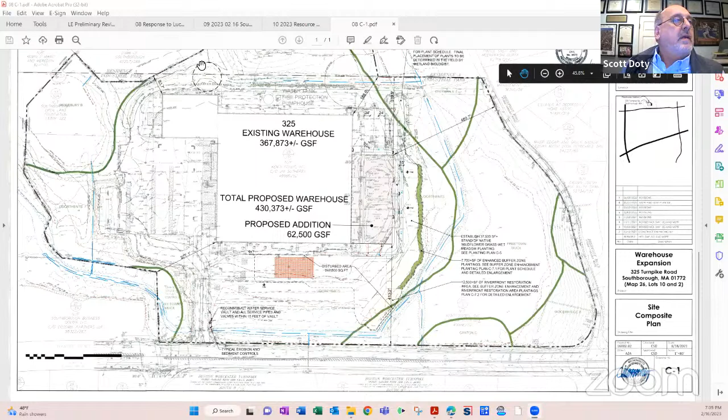Zooming in a bit, this is the west yard right here. And a great deal of effort has... by the way, Bill Pizzoni might join us. He had a conflict here, and he's been in the hospital on and off recently. He may not be able to join us, but he may pop in. Melissa, you may look for him on the list, and please promote him to the meeting if he comes in.

This is the west yard, the truck yard, and the proposal is a 16-foot high sound barrier that runs north to south.

I'll take you along the outer edge of this driveway curve at the northwest corner of the site, and then it angles off and runs along the west edge of the truck yard, closing down in the southwest corner of the truck yard.

The nature of the construction involves a sort of foundation — round precast foundations that get augered, with holes augured and placed, and then posts come out of them, and panels are laid on them.

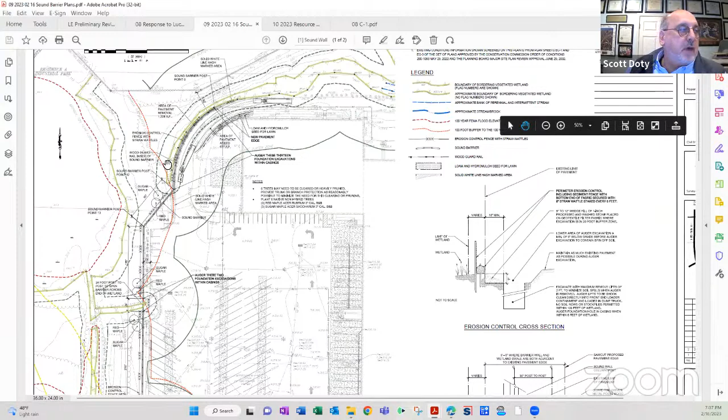There are a series of drainage channels built for overland country drainage that run along the edge of the driveway at that curve.

One of those finger-like channels extends towards the yard, and then there's another one that runs parallel, further away from the yard.

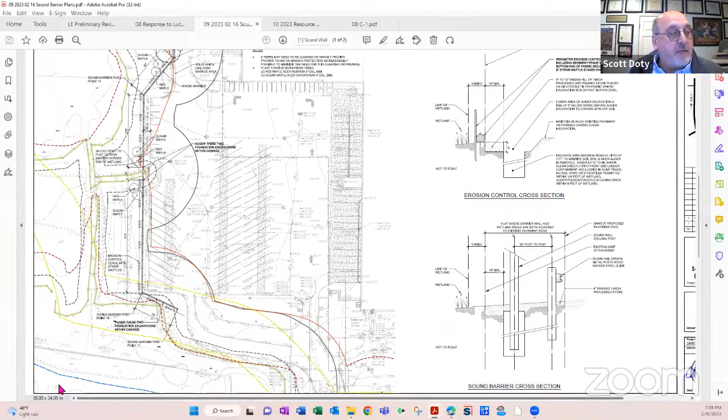Down here in the southwest, almost off this drawing — actually off this drawing — is the intermittent stream that runs around and through the overall site. So that's the general lay of the land.

I'm going to zoom in on the driveway curve on the next sheet. The planning board asked for some additional information on it, so we prepared this plan enlargement, which I think is helpful to everyone.

The wall runs along and will be built in what is existing today as paved area. What we will do is basically take the pavement out and build the wall in a gravel area on that edge.

Then we'll cut in on the inside of the curve and add pavement on the inside so we can still maintain access around that northwest corner of the building.

This is work that's within the 20-foot no-disturb zone, and so we're asking for a waiver for that from the commission.

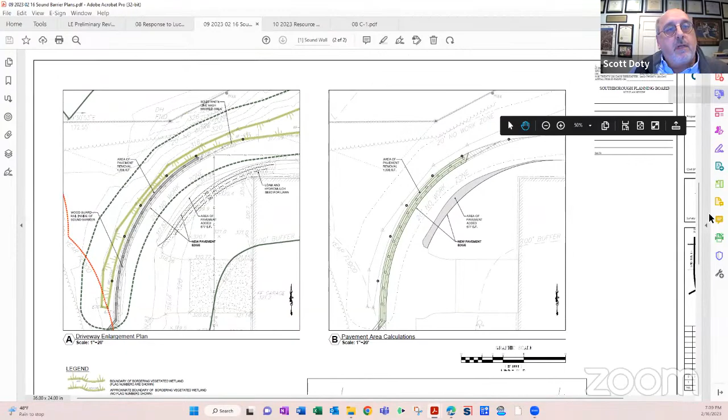As we continue on south along the layout of the wall, after it gets past the south end of the drainage channel that has developed into a wetland over the last 50 years, the wall goes off on an angle.

That allows it to run to the far west edge of the truck yard, about 13 feet off of the backside of the curb.

That allows us to keep lights and block heater stations and other apparatus that's along the back side of that west curb.

Again, you can see it's out in this area here, outside the 20-foot zone. The 20-foot no-disturbance zone line is this dark green dashed line I'm following now — I hope you can see the cursor.

This is that finger channel that, like I said, goes towards the truck area.

All the panels on the sound barrier are 15-foot pre-constructed panels put in place on top of these piers. We were able to get a 24-foot length, which we propose to bridge across the east point of this wetland.

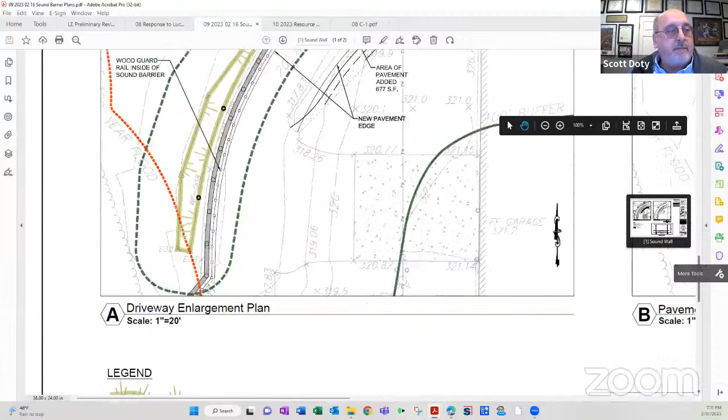What that may look like — we drew an elevation here. The slopes are probably slighter than shown, but the wetland is approximately 8 feet wide.

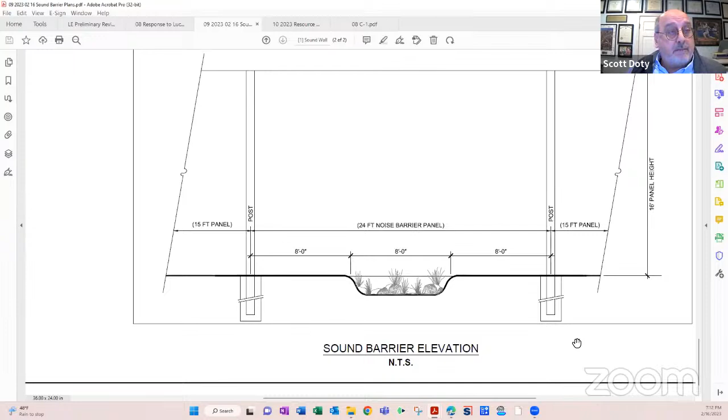We would have one post 8 feet off of it on one side and another 8 feet off of it on the other side, and then this 24-foot long panel would be attached to those two posts, bridging over that area and maintaining the linear layout of the wall.

I hope you're not getting too dizzy with me jumping around, but I'm back on the overall plan.

The wall then continues down until it gets to that southwest corner, and to enclose the noise generated by the yard, the sound consultant thought it was important that we then turn that corner.

So we go into the 20-foot no-disturbance zone again, outside of the wetland, and again we've had these piers that are 15 feet on center.

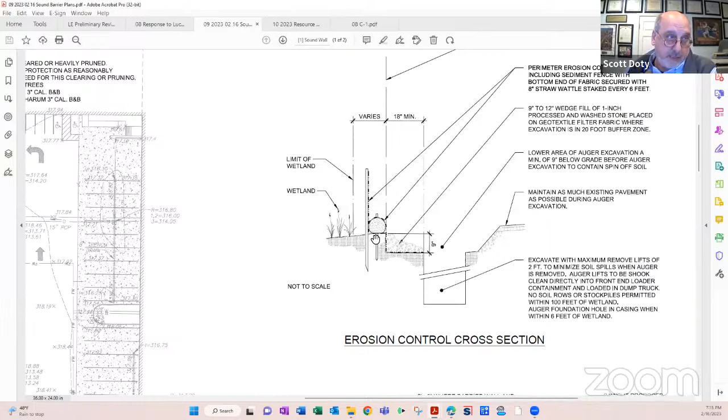I'd like to talk for a minute or two about construction of these piers. Though we are rather close, especially up here at the driveway to that wetland, we believe we can adequately protect it. The first step is putting in a good, robust erosion control fence anchored by straw wattle at its base. Then just where the piers are, and in some places near the driveway where it curves and there's room, we excavate down a bit so we're self-containing any excavation or spin-off soil that comes out as the auger digs these holes for the precast post foundations.

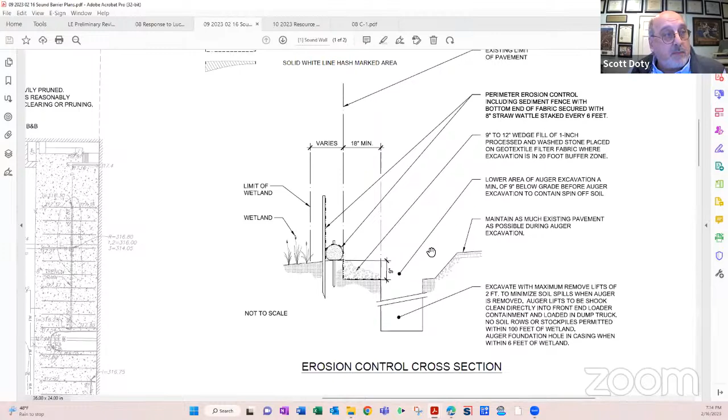We've provided a description of the phasing of the work that I hope you had a chance to review. Part of that is excavating and getting the soil out of this right-of-way area immediately, so that we're not stockpiling soil in the area, because what's going to primarily come back and fill in those areas later is a gravel surface underneath and around the posts where the foundations are.

Then the existing grade can be recreated, but instead of it being pavement or lawn in that specific area by the foundations, it is a washed stone.

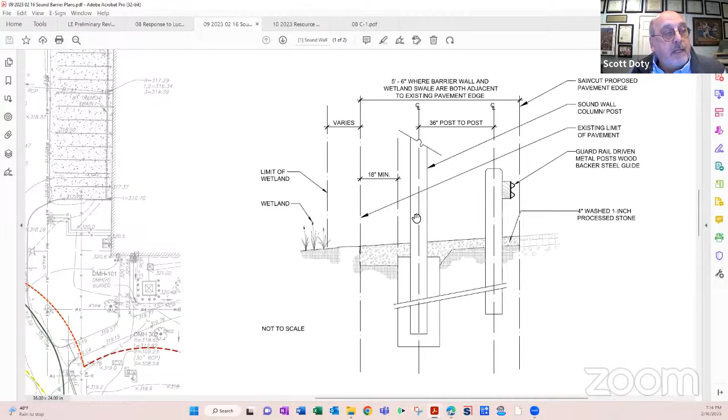Up in the area by the driveway curve, we think this is actually going to reduce pavement, which we think is a net benefit, reducing the impervious surface—not measurable, negligible probably, but still an improvement nonetheless, because we're going to be taking away about 1,200 square feet and adding about 700 square feet on the inside of the curve.

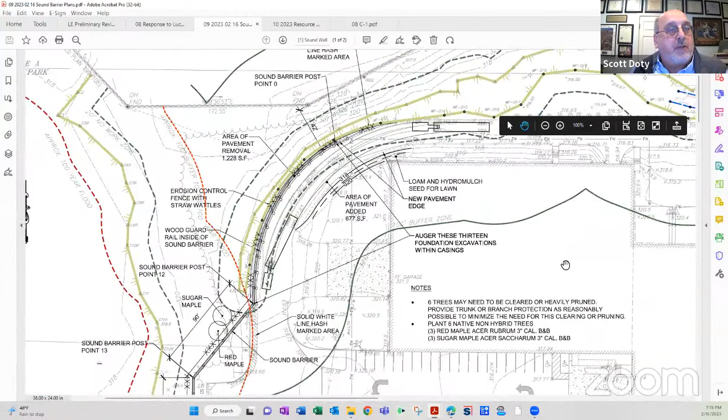In these areas, the drainage will continue to head towards the drainage channel, but now it'll be filtered somewhat in that stone gravel, much like the sound wall that was constructed on the northeast corner of the building back several years ago. You may remember that—some of you have been out to the site.

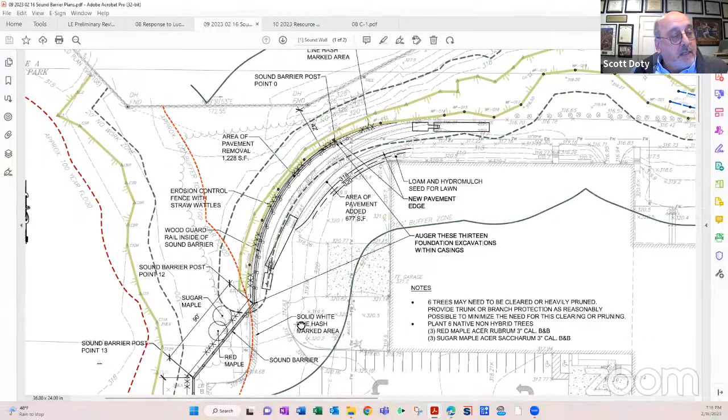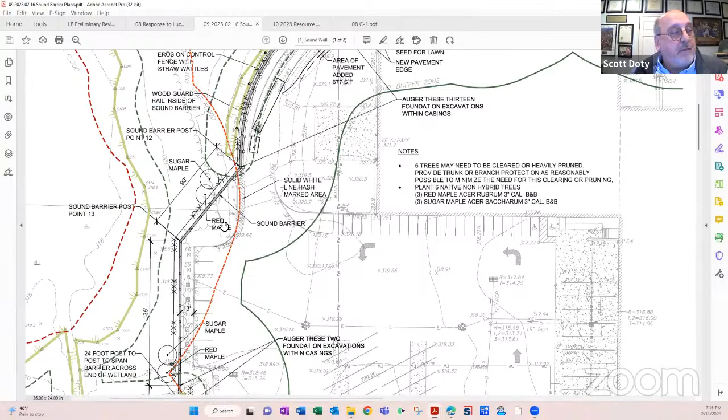Other elements: in a couple of places there are some mature trees over 6 inches. We think 3 or 4 need to be pruned, maybe 1 or 2 need to be really removed. We're proposing to plant a couple, 3 sugar maples and red maples in those areas where we think we're going to be encountering the need to remove some tree limbs, and maybe 1 or 2 trees in that general area.

I want to emphasize that we went through quite a process with effort with the neighbors and the Board of Health to come up with, and sound consultants on both sides, for Ken's and for the town and the neighborhood, a design. We do know we're asking the commission to waive this no-disturbance area, but we believe this is the best alternative for the sound, and any other alternative wouldn't do quite as well. We ask if the commission would kindly approve this.

Let me check my notes here. I guess that's about it. I'd be happy to answer any questions at this point, Mr. Chairman.

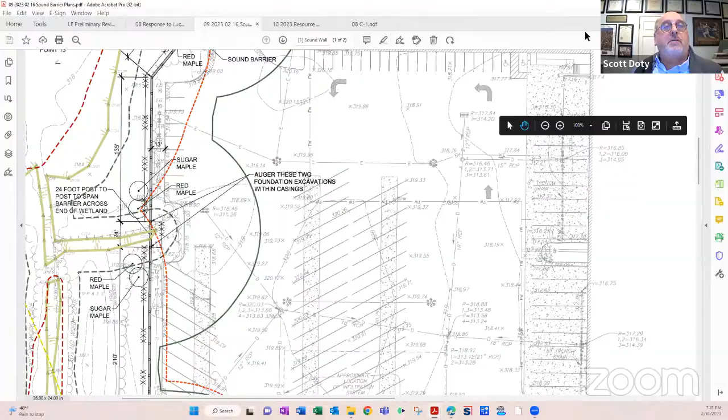All right, thank you. To the screen, if anybody wants to go to the plan, I can jump back to it. I know Joe went out, looked at it, had a good look at things, came up with some good points. We did address them and sent our response earlier today, copied Joe on it. One of them, I think, was a misunderstanding on one of the lines on this plan, and we hope our responses were okay and helpful. We'll get his update in a second.

First question I have, Melissa, is have we received an official request to waive the 20-foot in writing? I did in the narrative. I'm sorry, Melissa, go ahead—you were going to answer. I don't think you submitted the official bylaw request form, but you did request the waiver within the application. Oh no, I did. I think I did fill out a form. Okay, I'll double check. Yeah, I did fill out a form. If we'll check on that—if I'm mistaken, we could do that immediately. Sure, I did. Yep, I have it all set. Thank you, okay.

Joe, you have some commentary on this? Not too much, environmental. I did get a chance to go out and take a look at the site. The edge of the delineated wetland was staked in the proposed work area.

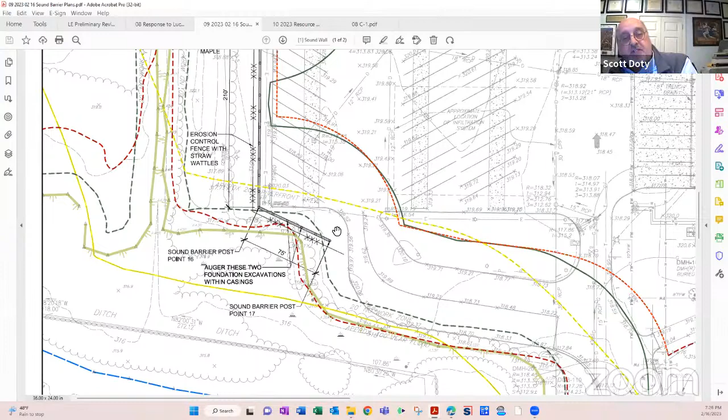I think it's probably important that the panels remain at their 15-foot length. Yes, they're standard, they're built that way. So you're not doing something unnatural. Right. No, it's a good suggestion.

I don't know that we're in need of anything else in terms of a filing tonight. So what we could do is condition that, Russ. Right, and if the sound experts kick that back for whatever decibel reason they come up with, we could say, since they put the 20-foot waiver in and we have the reasoning for it, you're asking for a little bit better mitigation. If they can't do it, then we're covered anyways. It'll probably still be in the 20-foot, but much further away than it is now.

These are all 15 feet, and that one's 24. I get it, but I do this for a living, and you start drifting a little bit, and they start multiplying, and it adds up. If we just start at the critical point, it's easy, and that's how this was laid out. That's the point of beginning for the coordinates on the spots.

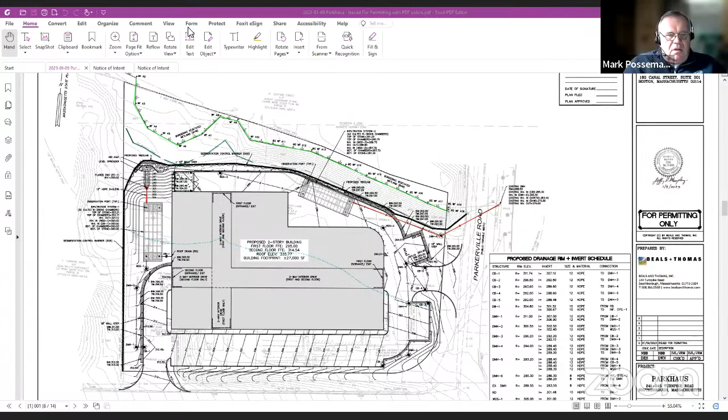Thank you. Question: how do the vehicles get to the second floor? I knew that was going to come up.

So there's a driveway entrance or garage door entrance at the lower level on the right side here, closer to Parkerville Road. And then this drive aisle that goes along the front of the building, between the building and Route 9, as well as the driveway coming off of Route 9, provides access to the second floor. There's no internal driveways or ramps inside the building.

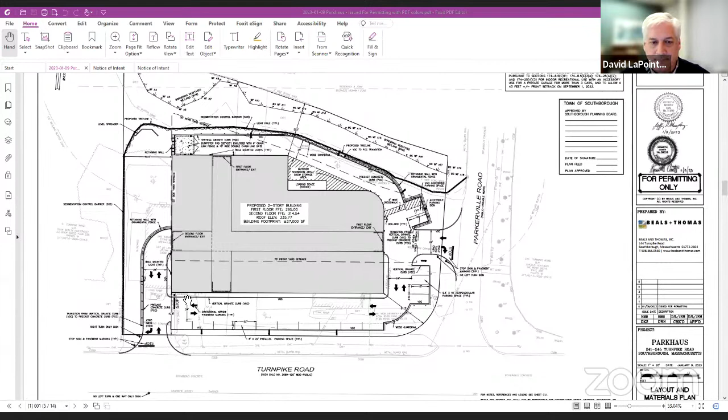Okay, yeah, when I saw that feature on the left there, the arrows, I was thinking there was an upper level entrance. Okay, thank you.

Yeah, let's open it up to Lucas, environmental consultant, for any comments at this point.

Yeah, I did have a chance to go out and look at this site and take a look at the delineation. There were a few flags missing and a few on the ground, but those were generally in the eastern portion of the wetland, which has a very steep slope and a clearly well-defined edge of wetland.

I did have a difference of opinion regarding flagging in the area of flags. I think it's A6. A6 is okay, A5, and A2 and A3. A2 and A3 I felt were a little bit low, maybe about 8 feet low.

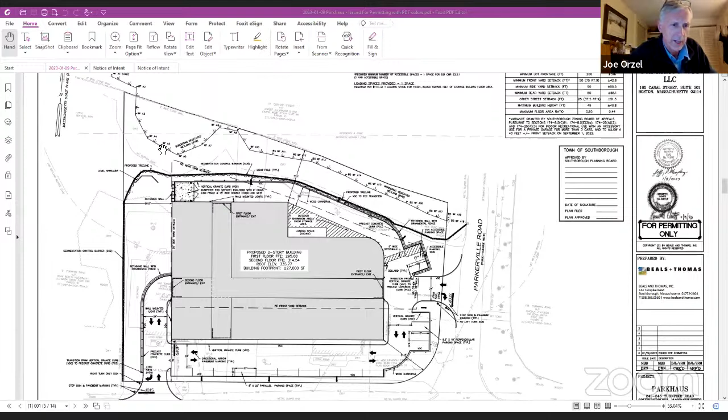And at A5, between A4 and A6, there's almost a gentle swale, a natural swale that kind of goes up gradient in that area. Although there's a lot of invasive species present at that location, I did see a fair amount of wetland vegetation and hydric soils. I felt that the wetland edge is roughly about 25 feet up gradient of flag A5. It kind of swings up from A4 and A5 to that point, which would bump up the 20-foot no-work zone. The rest of the flagging I thought was fine.

As I just noted, there was a fair amount of invasive species present at that location. It's true for much of the back of the property. So I recommend a construction phase invasive species management plan for any work that's going to be done at the back of the property that might impact areas with invasive species.

The proposal has a small amount of work within the 20-foot no-disturb zone at the eastern end of the site, along Parkerville Road. I don't know if alternatives were looked at for staying out of the 20-foot no-build or no-work zone. The applicant may want to address that. Granted, it is a shoulder of a road area, but I just didn't know if they looked at alternatives to stay out of the 20-foot zone.

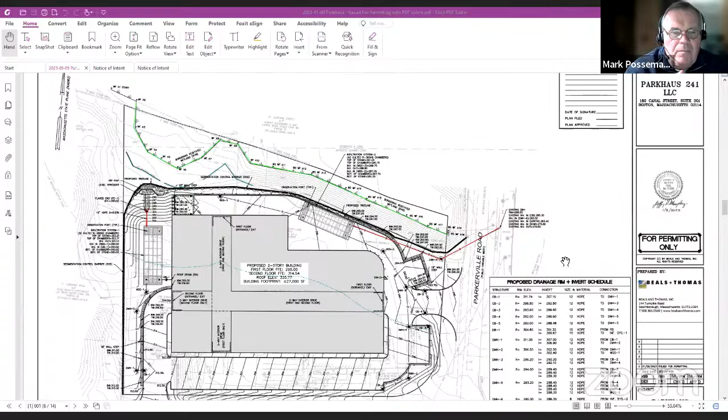So the septic system is currently still undergoing coordination with the Board of Health. But it is proposed, as you can see, between Turnpike Road and the southern face of the building, staying outside of the 100-foot wetland buffer. That's what I was wondering.

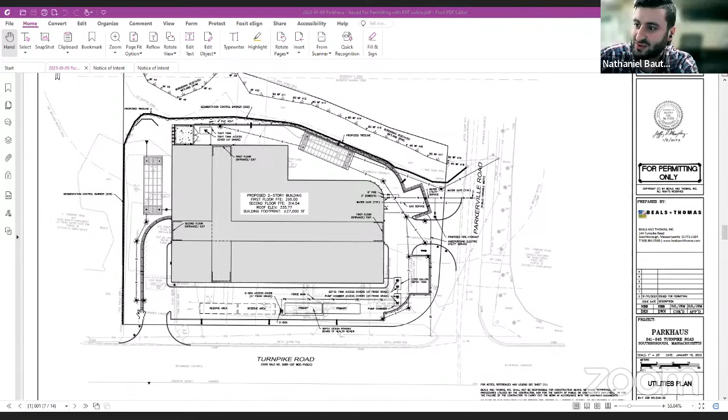On the eastern side of the site here, there are two rectangular design things right about where your cursor is. Go to the right and you see it. What is going on in that area? So these are retaining walls. Retaining walls on the site are proposed in three locations, as you ramp up from Turnpike Road to get to the second floor. But back to the east, why are those features that shape? What's going on in there? Parking spaces. Oh, okay, yes.

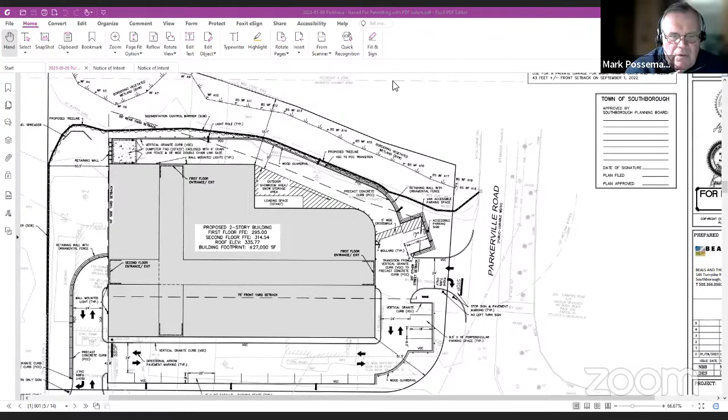Parking spaces. The layout and materials plan may be better to show. Yep, there you go. Okay, for the parking spaces. Yep. So the only parking spaces on this proposed site, aside from those being indoors, are those in that feature area there, and then to the south again, on either side of the entrance, off of Parkerville Road. Okay.

Melissa, do we have a DEP number? We do not. Okay. And we're still in the midst of a public hearing process with the planning board as well. Okay. And I think Fuss & O'Neill had some comments regarding the stormwater permit as well that still need to be addressed. Yep.

All right, other commission members, comments, questions? Yeah, you covered mine. I was looking for the septic tank too. I could see the drainage structures. Okay, anybody else, commissioners? No. I don't think we have anybody from the public here, do we?

Not a one, okay. So I guess the next steps are responses to our consultants' observations, questions, and issues. And we'll have to continue to the next hearing, or one further out, while you go through the process of the permitting?

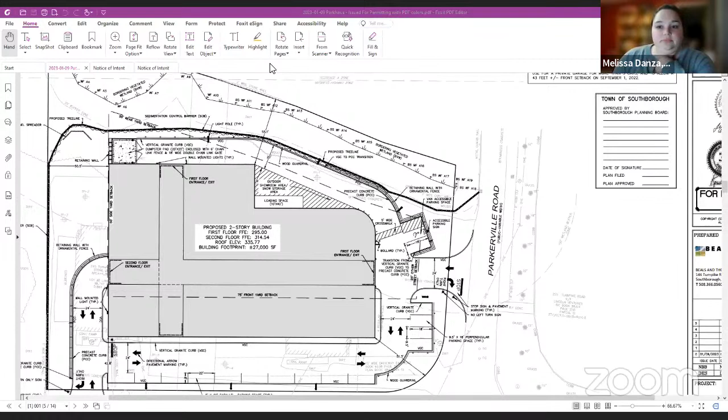So we meet every three weeks. Our next one is March 9th, if that helps you. I think we were thinking we were going to try to address the comments and get you revisions in time to be on the March 9th meeting. Yes.

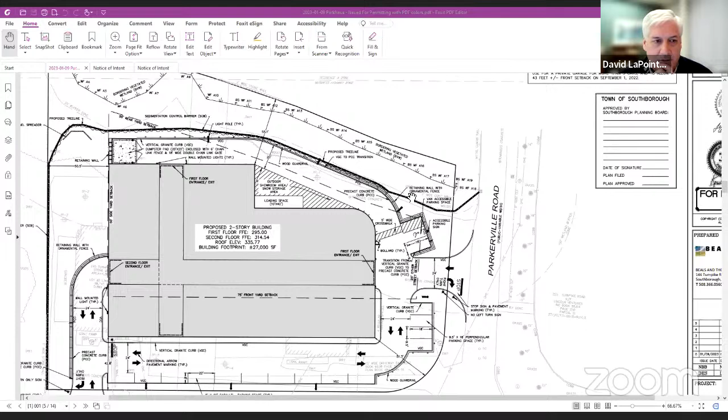But before we continue, can I just ask about the comment from Lucas regarding the wetland flag A5? By moving that wetland flag up gradient more, the 20-foot no-build zone goes with it, which would then put our outfall from our subsurface stormwater system in that 20-foot no-build zone. We were being very careful to try to stay out of it as much as we could based on the wetland line we were using. But at this point we're wondering if you would entertain a waiver request to allow that outfall within the 20-foot no-build area as a result of the change to the wetland flag.

Joe, how many feet do you think that flag has to move? I think about 25 feet. Oh, a lot. So that flag's going to be pretty much where the outflow is now. And then you got to get 20 feet off of that. Is it just one flag, or a point? It'd be just one flag. It would go from flag 6 to a revised A5 and back down to A4, essentially.

Why do you think there's a triangle there? There's like a little natural drainage coming down in that area. You can even kind of see it on the topos, the elevations that are right there, and how that kind of dips forward towards Route 9. Oh, okay.

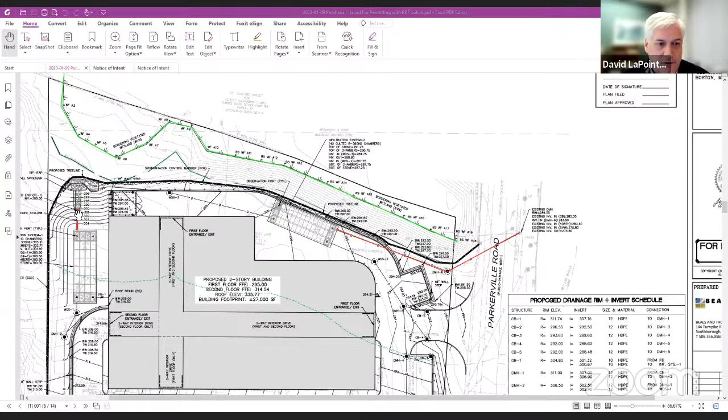I think if you guys can outline some alternatives and maybe put a narrative together, usually it's a lot easier for the commission to determine if there's no practical alternative, then they have some rationale. I like what Joe's thinking of, size, if it can go wider versus farther, but outlining maybe other areas and the setbacks for your various structures would be nice to lay out. Yeah, that's the other piece, is there's setbacks from the property line, from the building, so we're kind of squeezed in that spot a little bit. But sure, we can put together some rationale behind it.

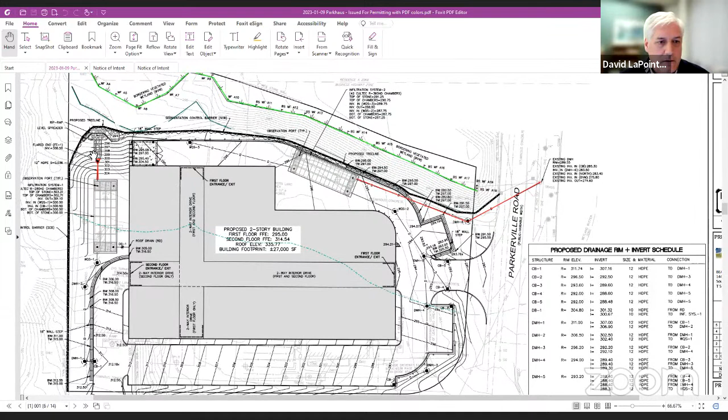Can you spin it around and put it on the north side, and have the outflow go to the west? I don't know, you guys take a look at it. We're not just gonna design it now, right, right.

Moving that flag 25 feet, we end up having a permanent disturbance, and we also have a disturbance where we have the outfall from that drainage structure really close to the wetland edge. It's really not that attractive.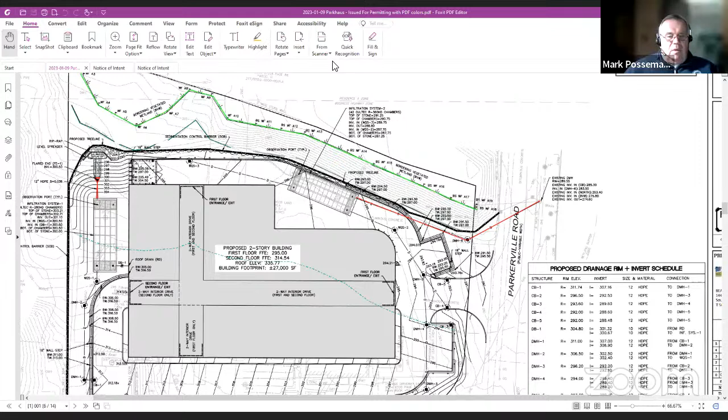So, all right. So what I heard you say is you think you can get all your materials in by our deadline to meet the March 9th hearing date. All right, so given that, we'll have to continue to March 9th. So with that, do I hear a motion to continue this hearing to March 9th?

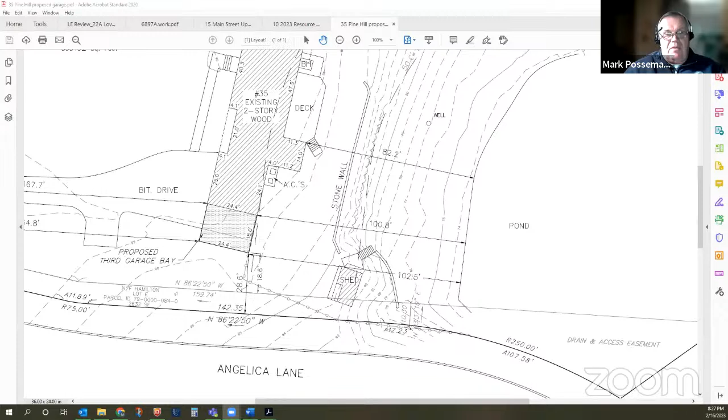And what was, okay, you just proposed the two alternatives. For me, I can go either way on this. It's going to be a temporary disturbance as they're doing the building and excavating, and it's rather flat there up into the stone wall, and there's also a stone wall there. So adding erosion controls at the stone wall, where it's 100.8 feet, I think we could propose some erosion controls and so forth.

But that said, Ben, who's not here tonight, said an RDA is not heavy lifting or a heavy cost thing. So we typically ask for RDAs, request for determination of applicability. So, being consistent, we might go that route. Me personally, I can go either way, depending on what the commission's desirability is here.

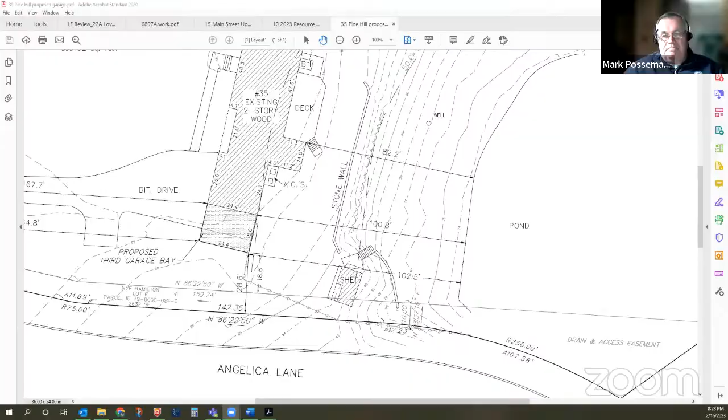It's to their benefit to have the paper trail from an RDA, in case any questions come up in the future. Only if they're asking for the wetland line to be confirmed, and that's a cost. Typically when I have a project like this that's close, if we make a determination that a permit is not needed, I make a note, kind of like a memo to myself within a file for property justifications. I can upload something to the building permit software as well, if that's the direction we go.

And do we know how far they would be going into the buffer area? Russ, is it typically a 5-foot over dig, or do you think it would go farther?

Nice, hey hi, what do you do? Russ, I- there we go. Your video was going. I was waving to you. You didn't see me? Yeah, I did.

5 feet's a good number. As long as they keep the construction traffic out of there and all you're doing is digging, it's a minor thing. You start driving the equipment around there and you're sliding down the hill, well all of a sudden it becomes a big deal.